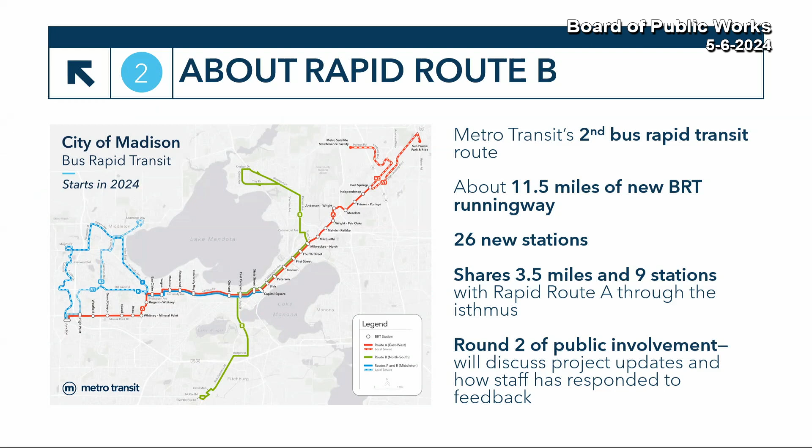Route B will add 11 and a half miles of new running way and stations, and then share 3.5 miles with East-West. So the total route will be 15 miles as well, coincidentally the same length. But because 3.5 miles in the middle has already been built and will just use those bus lanes and stations, that middle section doesn't have any changes. So it's split into a north end in North Madison, and the south part shown in green in South Madison and Fitchburg.

Some features of North-South BRT: service every 15 minutes throughout most of the day, high quality stations with raised platforms, priority at traffic signals, dedicated lanes, faster fare payment, all electric 60-foot buses, which will actually start this fall. We've purchased all the rolling stock for the line with the East-West BRT project—it made sense because of those shared stations that we buy all the buses at once. So those will already start at the end of this year.

Just a little bit about why we're investing in this route. One of my previous slides said it's the second busiest mainline route in the system. It's a very important route. It connects 53,000 people, 40,000 jobs, a number of other places and destinations, several major hospitals, Madison College in South Madison, and several low-income communities.

The long story short here is that Madison and the Madison region is a growing region. We're one of the fastest growing regions of our peers. Our streets are basically at capacity. We'd like to accommodate growth and have it be sustainable, not just have us busting at the seams with traffic congestion with no real alternatives. So we'd like to give people good alternatives with the BRT system, improving the capacity and efficiency of the bus system. So that's what we're doing here.

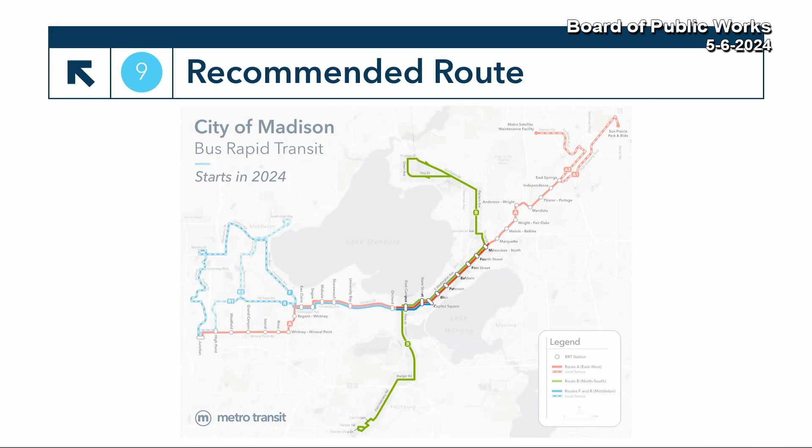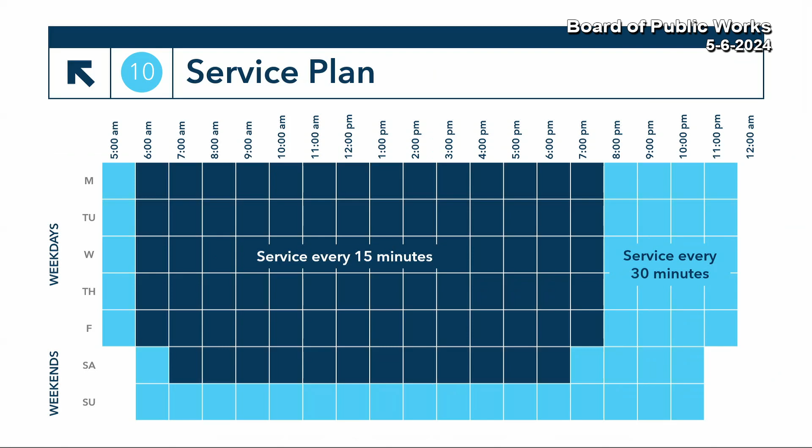That's a minor change. Service runs every 15 minutes throughout most of the day, matching existing service. When we implemented Route B in 2023, we set this up knowing we wanted to make this a BRT route, so service is already running every 15 minutes throughout the day, and every 15 minutes on Saturdays as well. Sundays and evenings it drops to every 30 minutes.

The stations are anticipated at this point to look pretty similar to the stations we're building on East-West BRT, for example along Mineral Point Road, East Washington, and University Avenue, where you can see several under construction. This isn't really your typical bus stop, but much more of a station. The platform is 13.5 inches off the elevation of the roadway, matching the floor of the bus so people can just walk on and off, making it a lot easier and faster to board, with less delay.

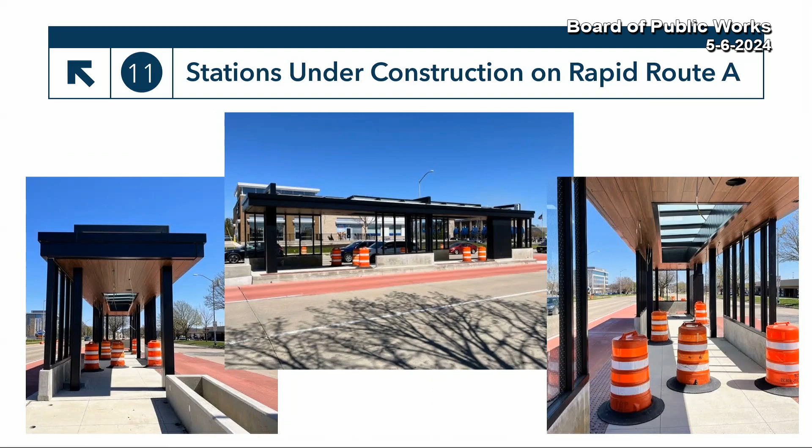People can board at any door on the bus. You see a roof covering the entire platform, and amenities like real-time arrival information, heat, benches, and so forth.

One thing we will be talking about is converting some of the side running bus lanes to center running. I'd like to go through some of the benefits of doing that. It provides more consistent travel time because it eliminates conflicts in the right lane with turning vehicles, bikes, deliveries, and people who park there for a short period of time. A lot of those conflicts really can't be removed from the right lane, so we build the bus lanes in the left lane. As you can see from the picture there, we can build one platform that'll serve buses in both directions, so there's some efficiency there.

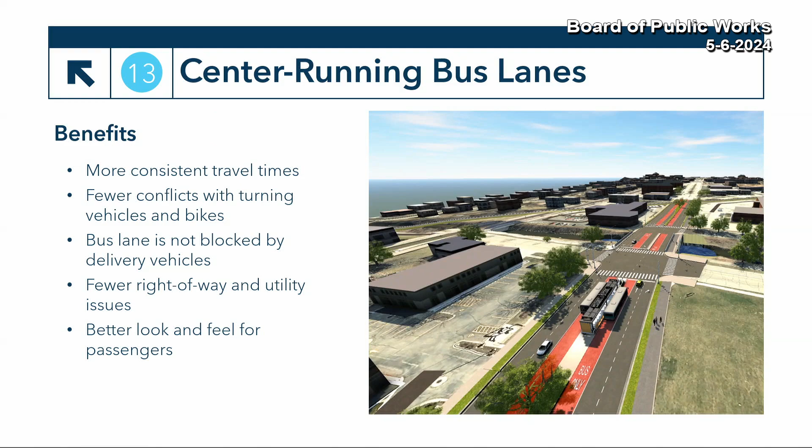Related to that, we get the question of how do you get to these stations. People have seen the stations being built in the median and ask how that's going to work. You have to cross the street today to ride the bus - you might not have to cross to get to one direction, but you'll have to cross on your way back or in the other direction. With center running BRT, you always cross the street to get to the platform, but you only cross half the street - so you cross half twice instead of the entire street once. It's the same total amount of crossing.

All of these stations are at signal controlled intersections. So you'd cross just like you were crossing the street, press the button if it exists, which it usually does, to get the walk light, and you only go halfway across. That gets you to the median, and there you are on the platform where you wait for the bus, or exit the bus and go back to your destination the same way.

I'll go over some of the details. I typically work north to south, and although a lot of this doesn't really pertain directly to Fitchburg, it's all one unified route. So I always talk about the entire route, and people who use the bus who might live in Fitchburg will often visit places in Madison on the north side or other places along the route. I think it's all connected together.

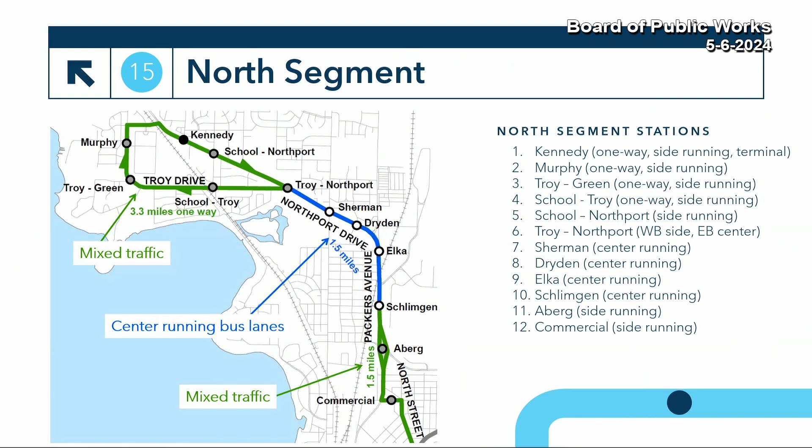The green line here is mixed traffic, so some of the route does operate in mixed traffic. It does a clockwise loop around Troy, Green, Northport, with a terminal at Northport and Kennedy. Then it comes in Northport, Packers Avenue, uses the on and off ramps at Aberg Avenue to serve stations on the ramps going to and from Aberg Avenue, then drops down North Street to East Washington Avenue. From there it follows East Washington Avenue concurrent with Route A through the Isthmus, around the Capitol Square, along State Street, and through the UW campus on University and Johnson Street, using bus lanes that primarily exist along that downtown stretch. Then it continues south on Park Street.

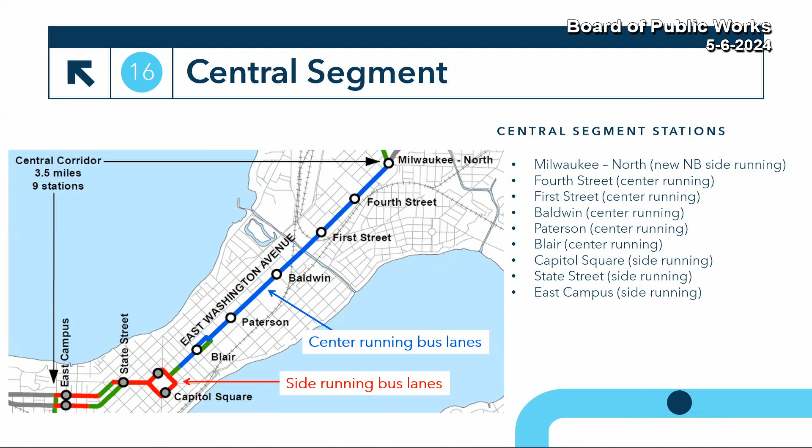On Park Street, we will have a full reconstruction project in South Madison between Badger Road and Fish Hatchery Road - the southern half of the line. That will replace the existing pavement that's in poor condition, as well as utilities. It'll create a widened sidewalk along the west side of Park Street, as well as build the BRT infrastructure concurrent with the project, so we'll have center running bus lanes along most of Park Street.

There are a few stretches where we do have mixed traffic, up at the north end where we have only two lanes in each direction to implement, so we do have to have some mixed traffic there. And then we have a small southbound stretch between West Washington and Erin where we need to preserve some on-street parking.

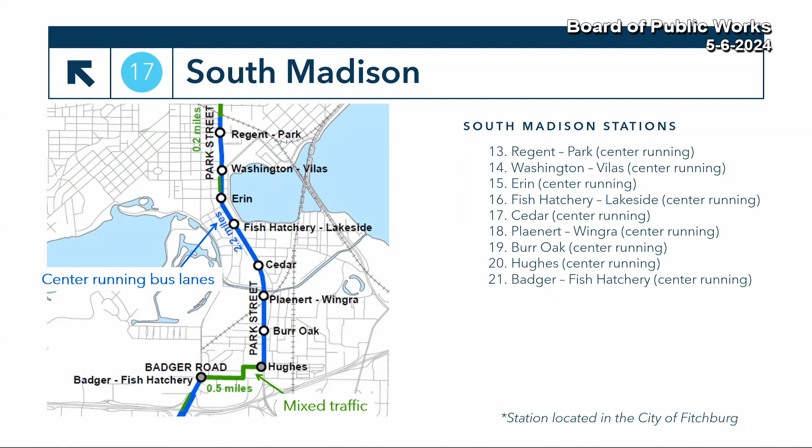We do a slight jog through Hughes, Cypress, and Badger Road, and then go south on Fish Hatchery Road, crossing the Beltline and entering the city of Fitchburg. In Fitchburg, we're showing five stations: Greenway, Post, High Ridge, Cahill Main, and McKee. We're showing bus lanes along Fish Hatchery Road, basically where they exist today. The route does a slight deviation to Caddis Bend and Cahill Main, to serve that neighborhood where the Cahill Main stop is. The reason for that is we have fairly dense residential development and retail in that area as well.

And it's really centered where that station is. We could stay on Fish Hatchery Road and the route would be slightly faster, but that deviation adds maybe a minute or two to the route. It really serves the people who need it, versus asking them to walk down Fish Hatchery when really all of the development is concentrated west of the road. Just wouldn't be great service. So we're doing that slight deviation.

And today, that is where Route B currently ends. It's basically where that Cahill Main station is. This proposal, or this locally preferred alternative, would extend the route from Cahill Main about a half mile or so to the south, to the intersection of more or less Fish Hatchery and McKee.

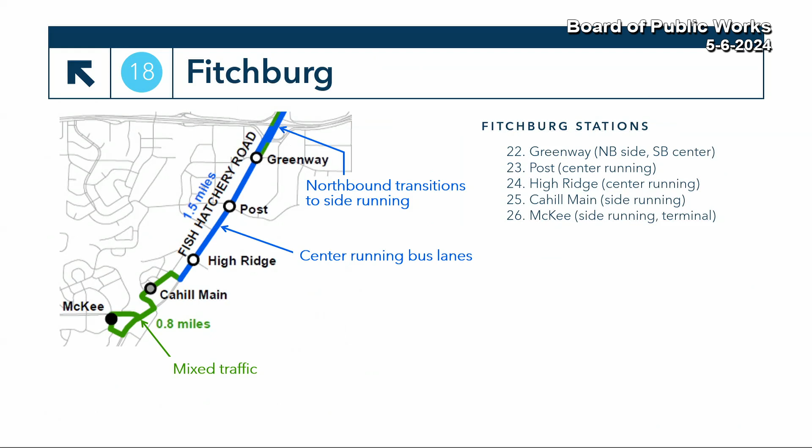And then kind of the third reason, I'll go into it in a little bit, but we'd like to set up a transfer point, a place where a couple routes can come together and make connections. That would be the 75 going to the west and the 65 going to the south and east. So that will prevent buses from going too far out of direction and make some nice connections there at McKee and Triverton Pike.

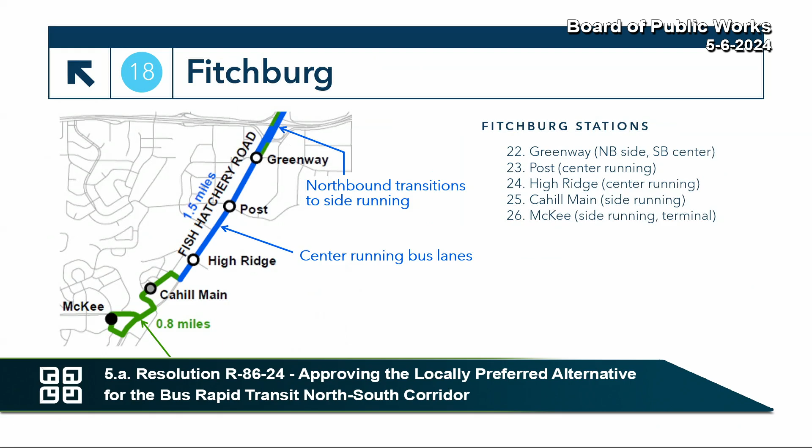I'll talk about typical sections. I have typical sections for the rest of the corridor, but in the interest of time I'm just going to show Fish Hatchery here. Fish Hatchery Road was reconstructed, I'm going to say about 5 years ago. So the roadway is in good condition. We're not going to remove those investments.

This project would retrofit BRT into that cross section that was already constructed. The before cross section on the top there shows 2 travel lanes in each direction and a combined bus and bike lane in each direction. And then we have a shared use path on the west side of Fish Hatchery. So this would be looking to the north.

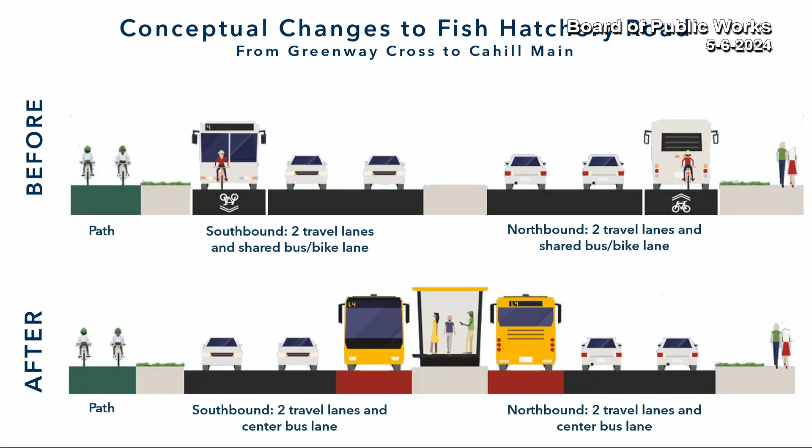With BRT, we would flip the bus lane to the left. So the right lane would become a general purpose travel lane, and the left lane would become a bus-only lane. We still have 2 travel lanes in each direction, a bus lane in each direction on the left side, and the shared use path on the west side remains.

One thing we've heard from people in the corridor in Fitchburg was the desire to maintain the shared bus-bike lanes for bicycle use. We looked at that and compared it with what we're doing in Madison, and what we do in Madison doesn't have to be the same as what we do in Fitchburg. But when we look at the guidance, we rarely put 2 bike facilities on a street today. We've done that in a couple of corridors, and we find that by great majority, people use the easier to use, off-street, more protected bike facility.

This chart on the left shows speeds on the x-axis and volume on the y-axis, representing traffic speeds and traffic volumes. When we have low speed, low volume neighborhood streets, we don't typically put any bike facility on; people just ride in the street. When we start to see the speeds and volumes get a little bit higher, we get into that pinker area where we have bike lanes, some kind of on-street facility to separate traffic from bikes.

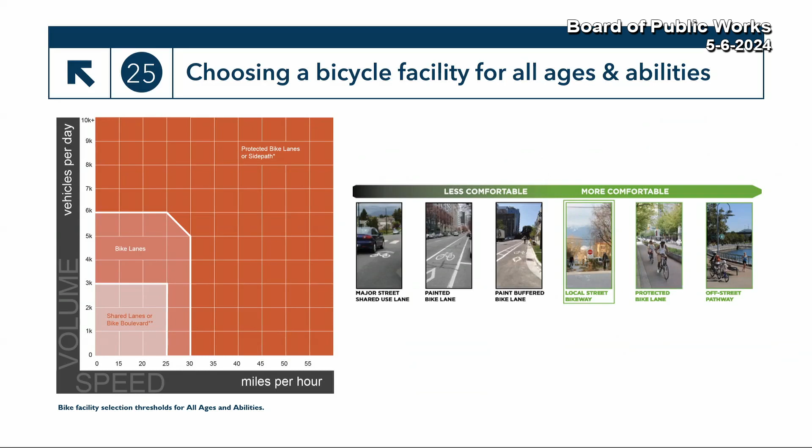And when you get into the higher speed, higher volume facilities, we typically do a protected facility or an off-street path, typical to what's on the west side of Fish Hatchery today. When we provide both two facilities, we find that people by and large use the more protected off-street path. So that's what we're proposing as part of the LPA.

I'll talk about some Fitchburg related updates.

We had some initial meetings back in November and December. We heard some useful comments and questions from policymakers, the public, and stakeholders. So I'd like to go through a couple things that have changed since then based on that feedback. One of the main things in Fitchburg was a desire to look at extending Rapid Route B from the currently planned terminal on Triverton Pike Drive down to East Cheryl or Lacy Road.

We looked at that in quite a bit of detail. We are not recommending it within the locally preferred alternative. The main reason is simply cost effectiveness. The corridor really isn't quite ready for the service levels that are demanded by BRT today.

There is no all-day service on this corridor. I think it should have all-day service. We're working to add all-day service, but it's a really big jump to go from no all-day service at all to service every 15 minutes. It also reduces the competitiveness of the entire route, because it adds a mile or two of route that's entirely in mixed traffic, and it doesn't really add a lot of ridership to the route.

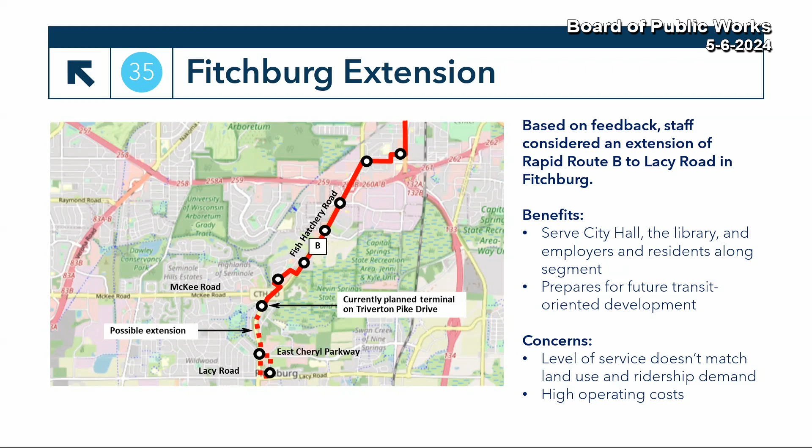The Federal Transit Administration looks at these projects and compares them to others on the national scale. It looks at cost effectiveness and other measures. So we just don't think this part of the corridor is quite ready, but we think it will be at some point. We'd like to take some first steps towards getting it ready and providing all-day transit service, and today that solution looks more like this.

This concept would end Rapid Route B at the Triverton Pike Drive terminal, but it would make some investments in Routes 65 and 75. These are currently peak-only routes, and this would increase the service on those routes to provide all-day service. It would be lower frequency than Route B — it wouldn't run every 15 minutes, it might run once an hour or something — but that's a little bit more appropriate for these types of corridors.

As I mentioned earlier, we think it's a good splitting-off point at Triverton Pike and McKee. Route 65 going south could operate as some kind of unofficial extension of Route B, where every other bus, or every fourth bus, or every third bus continues south as a Route 65. Or perhaps Route 65 could turn into Route 75, providing a solid east-west connection through Fitchburg with the connection to Route B at Triverton Pike. Ultimately, I think we'd like to see Route B extended — it's not like we can't extend it in the future — but I don't think it's the right time to do it with the North-South BRT project.

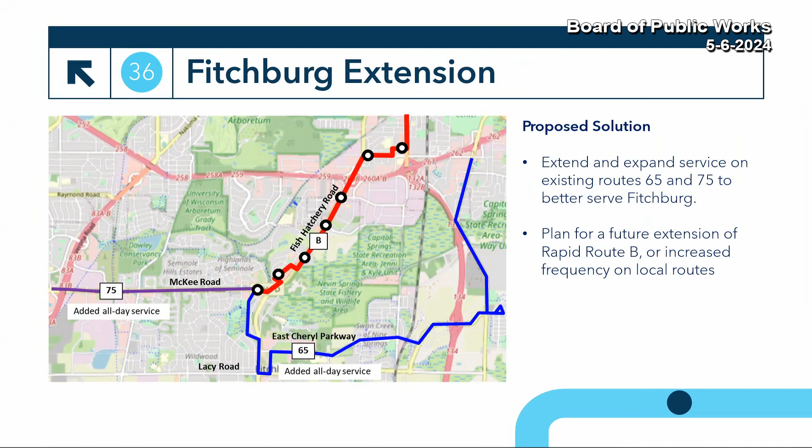For example, we have Route O, which does kind of an awkward big one-way loop. So depending on what happens with Route O, this could somehow get connected into some service change with Route O. It's a little bit hard to look at some of those concepts when they have so many moving pieces.

But as it pertains to the city of Fitchburg, we've just drawn this out that it would run this route, and then it would go somewhere from there. So the city of Fitchburg funds the route essentially as it runs through their city. That's kind of the way we've laid it out. And we've said if this moves forward, we'll figure out what to do with it once it gets into Madison and Madison is funding it. But it wouldn't go nowhere, it wouldn't just end there, it would connect back into something.

I just wanted to make sure that people in Southdale, if they wanted to get to Madison, wouldn't have to go south down to Cheryl Parkway, et cetera, and head to Triverton Pike to get Rapid Route B to get north.

Right, yeah, that would be infuriating to be so close and yet so far, so we tried to make that connection.